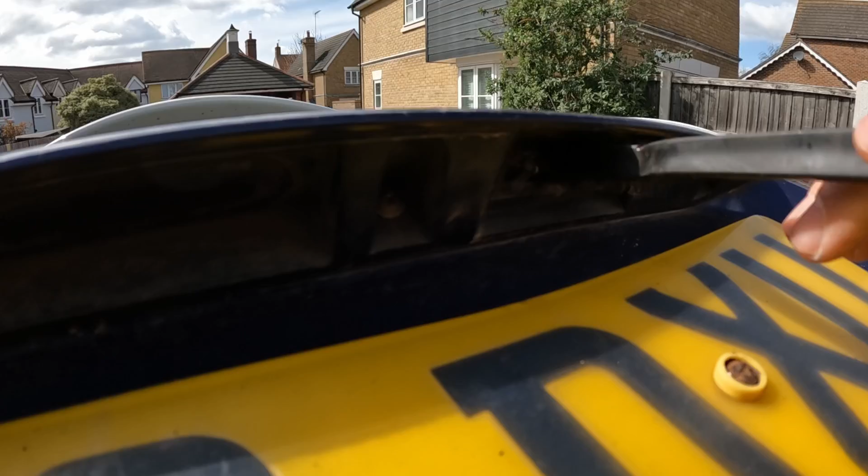Oh look, you can see that, that's all just coming out. Green stuff. Hello and welcome back to yet another episode of me trying desperately to get this car working.

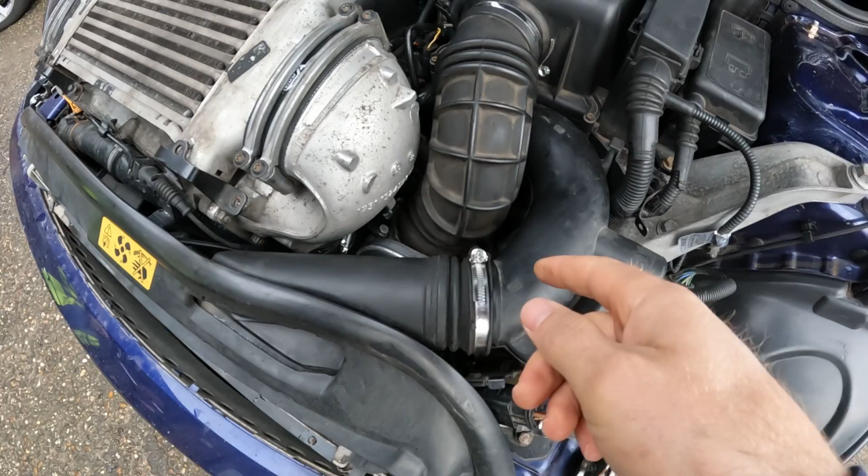I am here at Torque Monkey in Chelmsford, where the fantastic Tim, who's just there, is going to come in here and take a look at this boost leak that I've got. So you know I was chatting about the clamp on the hose right at the bottom there, and I couldn't get it past the plastic part of the intake for the supercharger. Saw that in the last video.

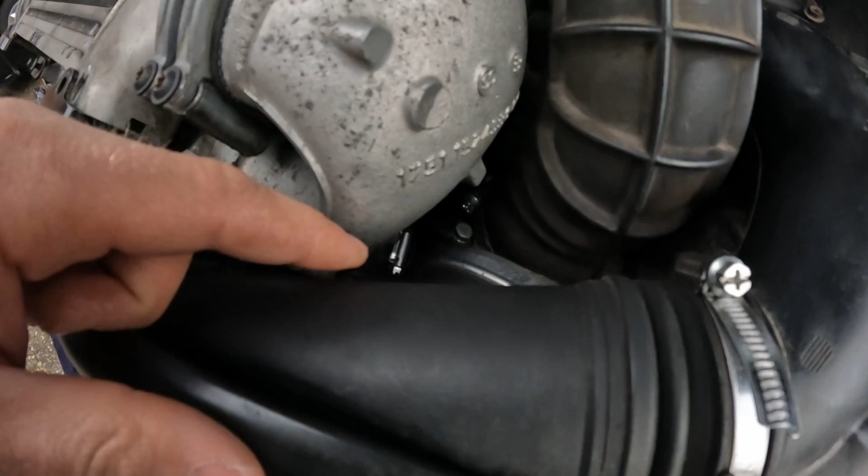He reckons it might be something as simple as that, and there is a way of actually getting that clamp on there, even though it's like 1mm thick. It doesn't go past the inlet. Tim reckons it could be that. If not, he's got some other places to look at.

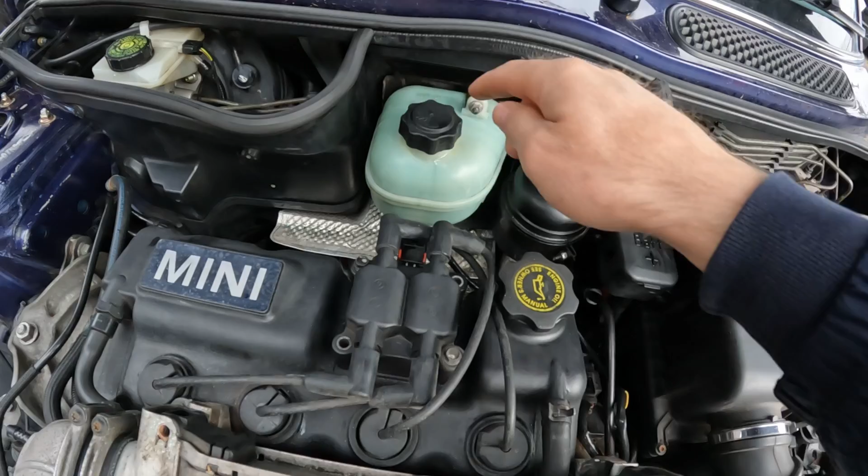And also, I think we worked out what might be the deal with this reservoir. It might be simply that it's not actually linked to all of this. This is just third party and it's not really the correct item, so it's just not sealing properly. I think we might just try and get a genuine BMW Mini item, and that might just fix that little thing there, so that's good to know.

See, that's something that you don't know when you're just poking around the internet by yourself. There's no way I ever would have looked at this and known whether that was OEM or not, so that's why you have to call on the professionals from time to time. See, look, it won't even go on properly. Piece of... But he's very knowledgeable on these R53 Minis. We've just been chatting for ages about it. I think I've just used up loads of his time. But check this out.

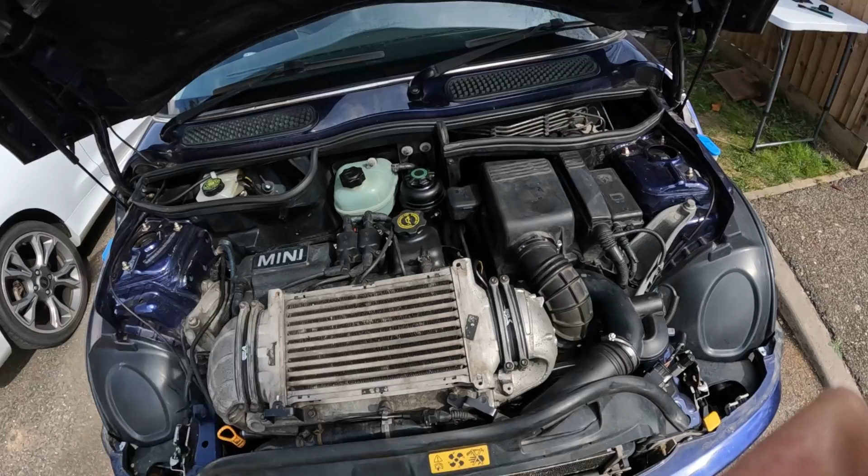Right, okay, it is the next day and I've got the car back from Torque Monkey Garage, and it looks like they've fixed it, which is absolutely amazing news. I've just got the car home now, it's running, it's up to temperature, let it sit for a bit, see if anything happens. But it absolutely definitely was a boost issue. I'm going to take you through everything that was wrong with it, but even just listening to it now, it's idling a lot nicer. I suppose before I didn't even realise that it was idling poorly,

but right now it sounds a lot nicer than before. Okay, so a few of you have been pointing me in the right direction with this boost leak, and the main culprit was this green seal here. It's hard to show you now with the car all back together, but you saw in the last video there's a plastic pipe that runs down into the intake for the supercharger. Now a few of you have mentioned this. GH in the comments, you've mentioned it, but there's a guy going by the name of Mini something like that.

Oh, the bonnet just closed. That's ever so nice of you. It is really windy. I don't know what's going on with the weather. The temperature's just dipped to 8 degrees. It was 17 degrees the other day in bright sunshine. Today it's been snowing in parts of the country. I don't know. I don't make up the rules.

All I'm going to say is Mini Doniel, if that's how you say it, has been commenting on pretty much all of my videos, saying it's the green seal, it's the green seal. Thank you for that. I was paying attention, I was listening. I just couldn't be bothered to get in there myself.

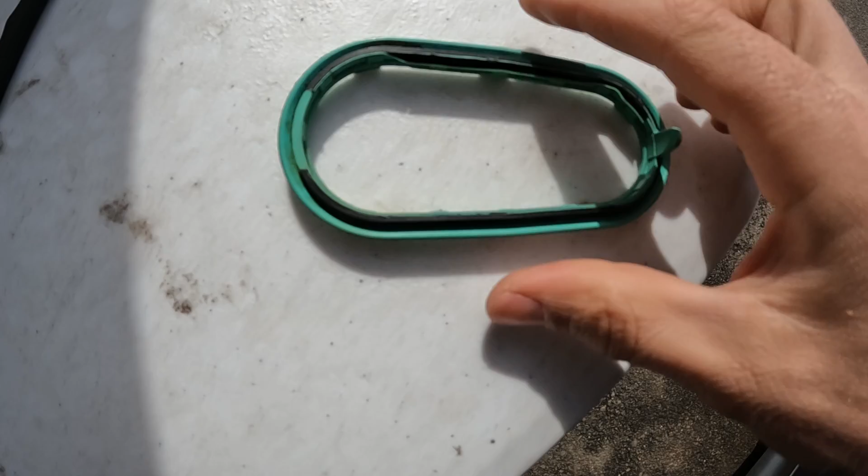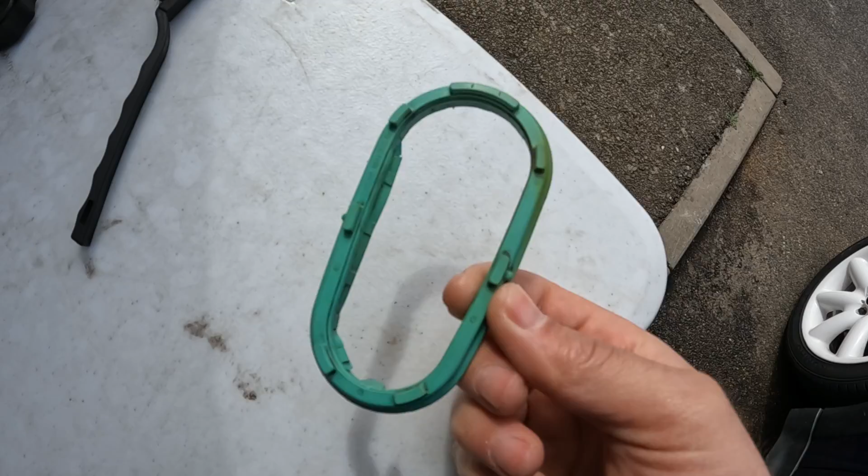So this seal is brand new, I replaced it when I serviced the supercharger. You can probably already see that this bit of rubber right here is split, and it's split in there too. What was actually happening, this had folded back on itself like that, so it just wasn't sealing anything, air was getting through past this gap, and that is what was causing the whistling sound.

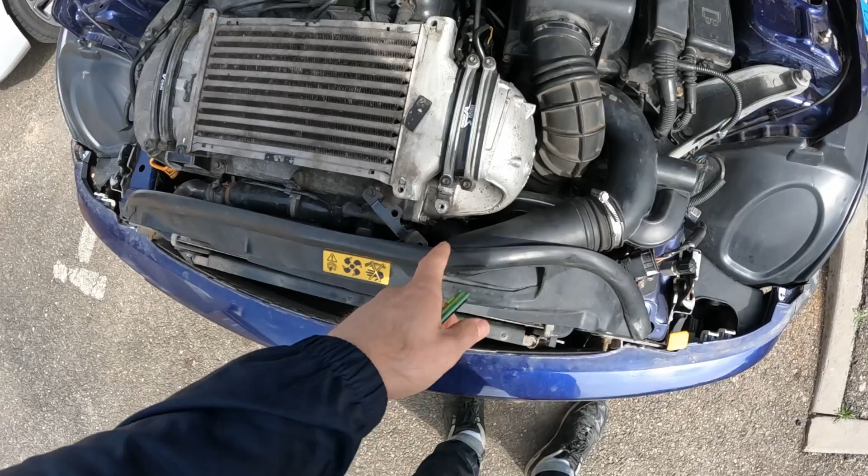Now I broke this, because when you take the plastic pipe off to service the supercharger, this green seal sticks into the pipe, so you pull it out, and then it looks obvious that the way this goes back on the car is you put this back into the plastic pipe, and then push the plastic pipe right up into the supercharger again. But it lulls you into a false sense of security, because this sticks into the pipe and it's not supposed to.

What you're supposed to do when you reinstall these is you actually slip this onto the supercharger part first, then you butt up the plastic pipe. I did it the other way around, and so that's what caused that to break. So the guys at Torque Monkey, what they've done is they've put a whole new green seal in, and they've fitted it properly this time.

The rubber hose that you saw connecting the intake to that plastic charge pipe as well, they've now replaced that with a much nicer item than the one that I replaced it with. And it's a proper silicone hose, and they've managed to get the clamps around it. There is a bit of a method to actually getting it on. They've done that as well. And I mean, the car's running now. Let's give it a rev.

Nice. It would have started whistling by now easily, especially revving it like that. So it definitely looks like that's fixed. So that's fantastic. So that means the engine's actually going to be running nicely now, because air is getting in through the intake. It's going past all the correct sensors, and so it's not going to be over fueling and then running rough. So this is all fantastic news.

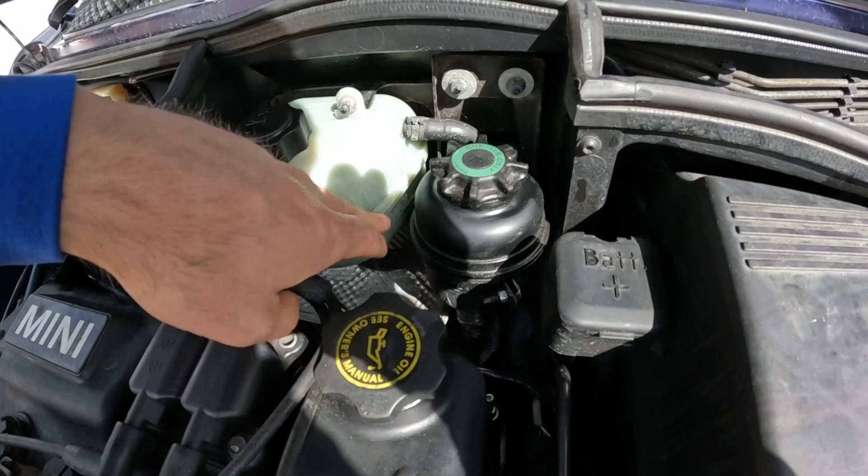Okay, so now on to the coolant issue. Thank you to everyone that commented on the last video offering up suggestions as to what might have been causing that. It turns out it was actually pretty simple. A couple of you did actually catch it. So one of the weak spots on these Minis are these tanks, and so apparently they fail around the seam around there, and they can fail at the hoses and that.

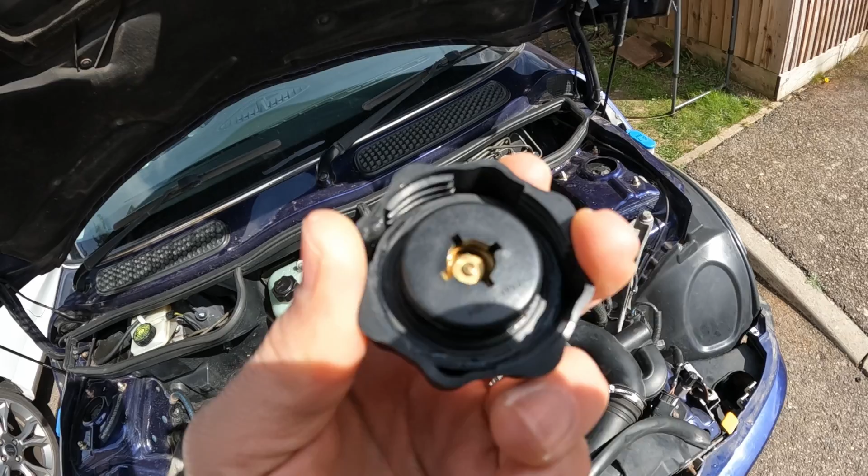On this particular one, it was actually the cap. So this is the cap that was on it before. This cap has just kind of failed. So if you can see this, sorry for the wind, it's really flexible. It's so easy to just push and mold like that with your hand. And we think that this is a non-OEM cap. This is actually just an aftermarket cap.

And so what it was doing, you could actually put this cap on and you could turn, and you could just keep turning, and it would basically never seal completely properly. You could over tighten it really easily, and then you go back to stage one and it'd pop up, and it was doing all sorts of mad stuff. Why would that cause such a catastrophic failure of the coolant if it was just the cap? Let's get into the classroom.

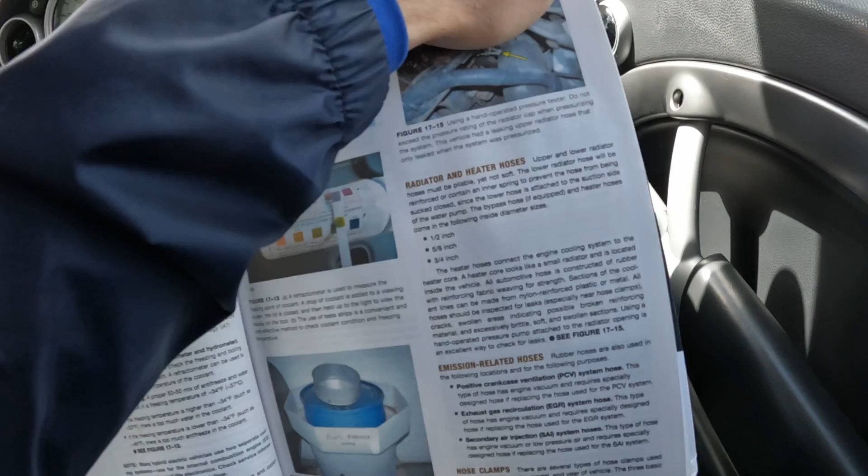And I say the classroom because I've been studying. I'm trying to take this whole car thing really quite seriously. And I purchased this book, Automotive Technology, Principles, Diagnosis and Service. I mean, it's a monster of a book. You can just see how thick that is. It's absolutely ginormous. It is a textbook, and it is incredibly dry. And I've just started reading this thing, basically cover to cover. Deals with absolutely everything you could ever imagine. It tells you all the principles of the car, how they actually work.

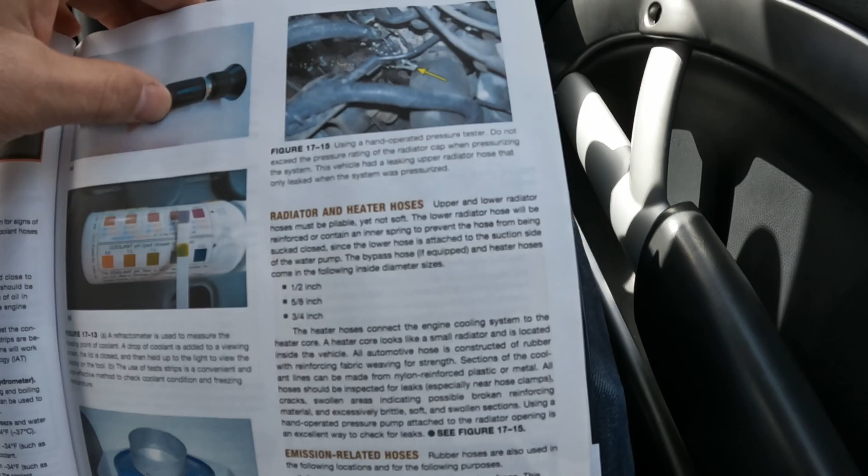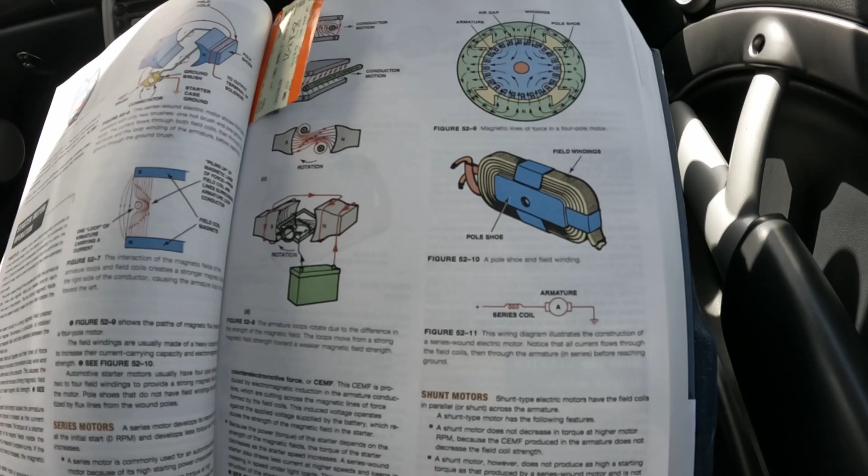I mean, look, if I just flick to this page here, this is starter motor operation. It's got all these diagrams, tells you how starter motors work, what to look out for, how to service them, how to diagnose if you've got a bad one, da da da. It's so in depth. It's great. If you're like me and you're just coming from zero and you don't have a teacher, just start reading this thing. I have. It's been absolutely illuminating.

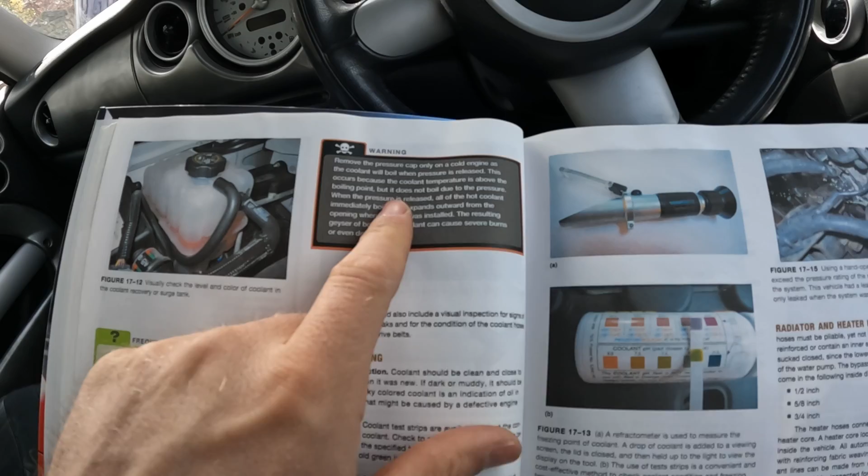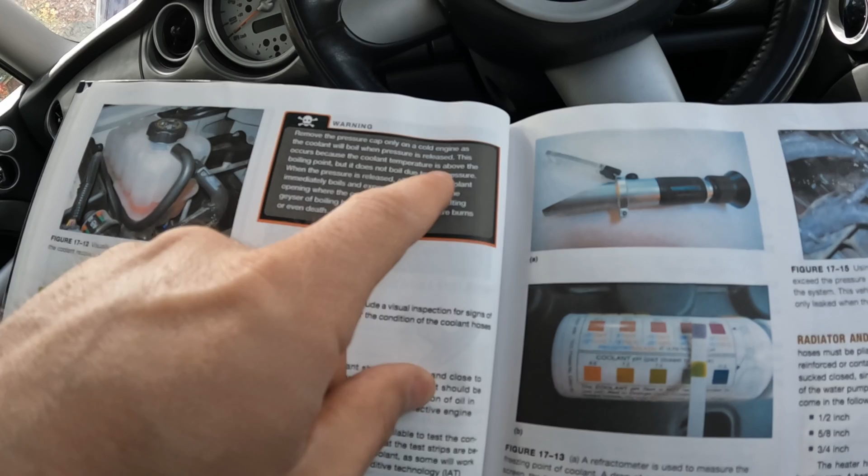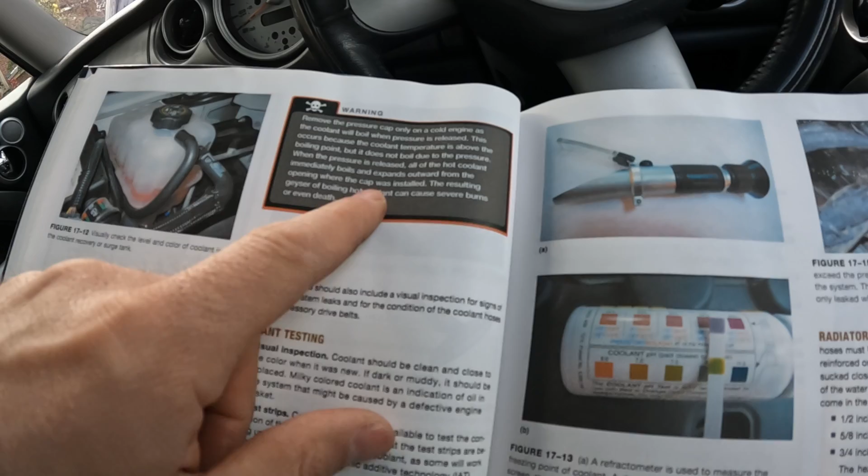Anyway, right, and the point of this is that it just so happened yesterday I'd got to this page. I'm in the coolant section, and there's this big warning here, and it says, remove the pressure cap only on a cold engine, as the coolant will boil when pressure is released. This occurs because the coolant temperature is above the boiling point, but it does not actually boil due to the pressure. When the pressure is released, all of the hot coolant immediately boils and expands outward from the opening where the cap was installed. That is the issue. That is the issue I had, right?

So what was happening with the coolant tank on this car is that the cap simply wasn't making a proper seal. So when the whole coolant system came up to pressure, the cap just isn't making a seal. It begins making a seal because there's not that much pressure, but as the temperature rises, there's an increase in pressure. Now, if you think back to being at school, this would have been GCSE physics or chemistry. You had things like the ideal gas laws, Boyle's law, Charles's law. I think one of those laws probably applies here.

You might remember the equations like P1V1 equals P2V2, those sort of equations. Basically, what's happening here is the cap is sealing just fine, the pressure of the system rises, the cap is then failing, and then that sudden change in pressure allows the liquid inside the coolant tank to actually begin boiling where it couldn't before because it was being kept under pressure, and that was what caused it to go shapow everywhere and all over the engine bay.

So, you know, we've had the car running now for quite a while. It's come up to temperature. They've put new coolant in it for me, and that cap very much seems to have fixed the problem.

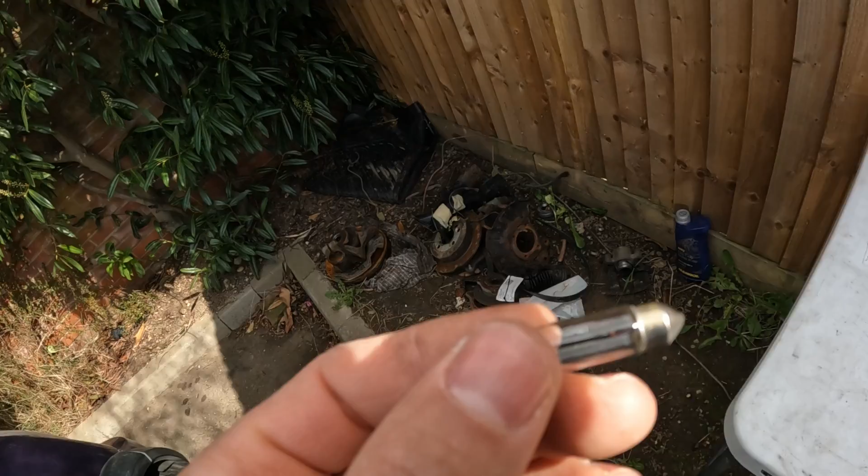Oh, look, you can see that. That's all just coming out. Green stuff. Uh-oh, don't break it. Do not break that. Is that it? Okay, this isn't good. That doesn't work at all. Oh no, I need these for an MOT today. Why is it? It's just the smallest of things. The smallest of things. Oh, nothing I do is making this work again.

And you know what? So you've probably seen that I've got these 2 rust spots. This is quite common actually on these Minis. I don't know how it gets in. Maybe it gets in through the seal up here. I mean, I've got a rear wiper delete and it's pretty much just this bung in there. It's not exactly the most secure of things, but water's been getting into here and it's been getting into here,

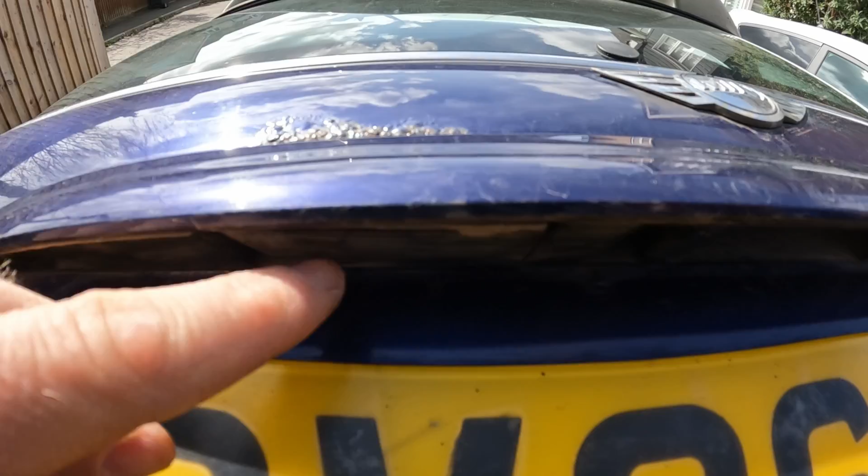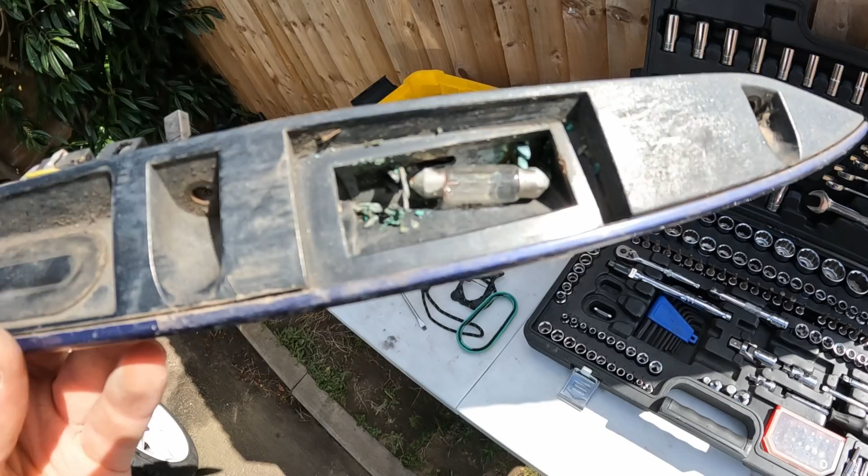or it's been getting up here or up there, I'm not sure, but you can see that it is right above the lights. So these units have clearly just gotten so much water in them that they've given up the ghost. Yeah, I mean, I just need a whole new unit in there, don't I? So I just pulled that whole assembly off and I just opened up the other lamp. I mean, look at that in there.

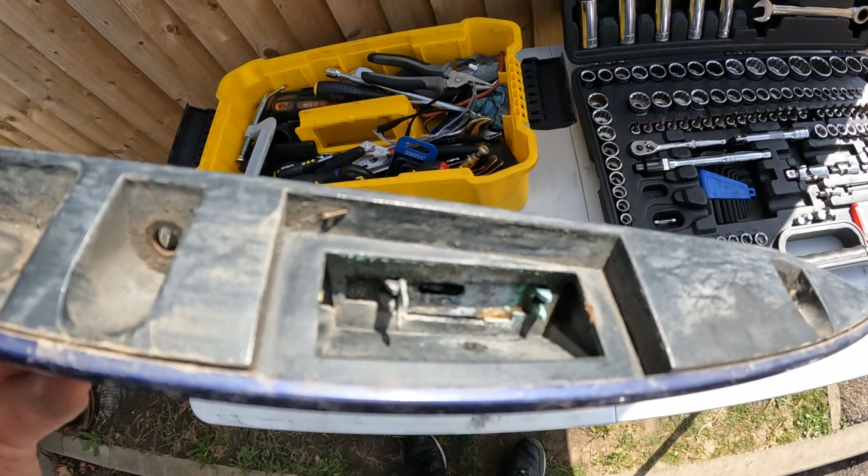I was really hoping that maybe I could just clean this up just enough to get them working a little bit, but that right there is the actual bulb holder. That's the bit that's supposed to conduct electricity into the bulb, and that's just snapped off. And I just checked as well, and you need both of these lamps working so as not to get a failure, believe it or not. You can't just have one going, so I need new units to actually go in here.

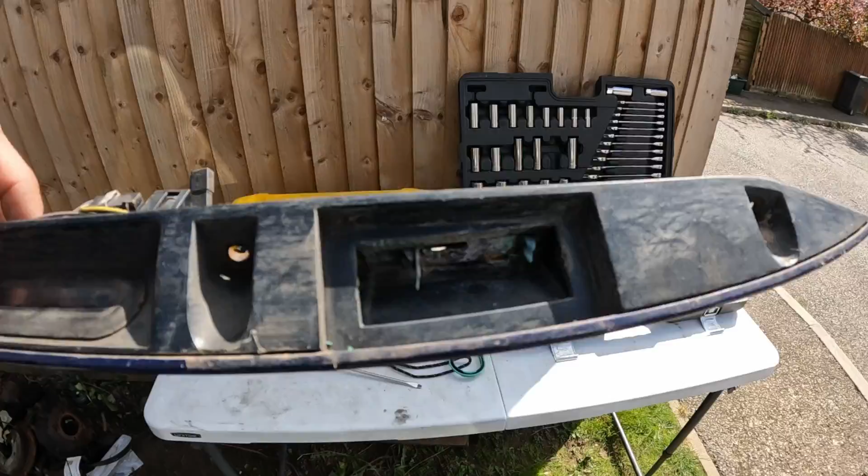There's not really any other way around it, I don't think, or maybe even just a whole one of these, because I'm not even sure they separate and come out. What a pain. You know, and this isn't even really a matter of safety, is it? Illuminating your number plate. There's nothing good that can ever come from having your number plates illuminated, because there are only a couple of agencies in the entire country that care about what your number plate says. Yeah, it's just bureaucracy.

Yeah, it's just a bonnet closing by itself again. No, you are having a giraffe.

Give me strength. What? Well, so it very much does look like you need a whole new one of these. Now the problem is obviously this is painted, and you've probably heard me say quite a few times, this colour, this black eye purple, is incredibly rare. So I did try to see how many of these have been sold. I could only find US sales data, and in the 18 months that they offered this particular colour, it accounted for 1.2% of all units sold in the US. Just to give you an idea of how rare that colour is.

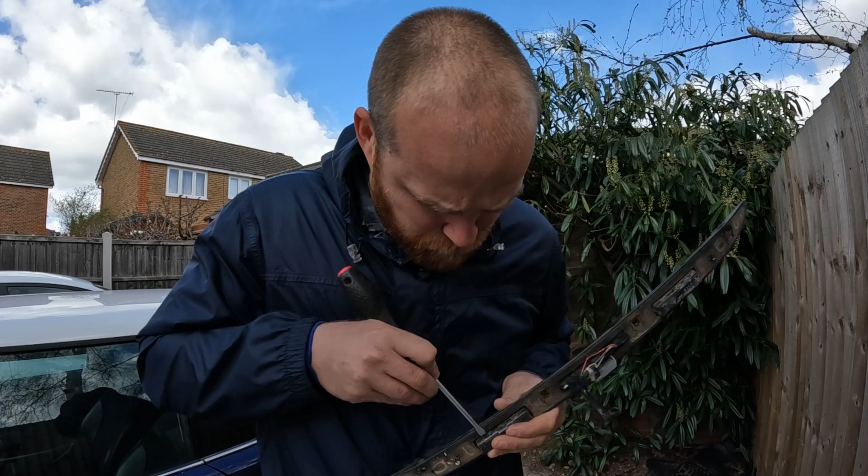And so when it comes to buying anything this colour, well, there's nothing. It turns out there is actually one of these on eBay, and it's £60. £60. That's just bonkers. I have to. Doesn't matter if you can't. Hang on a minute, maybe I can get in there and get that off. Oh, well, if I didn't need a new one, I do now. Ugh. Well, I've just snapped the cover off, but look at it. That's the electronics, and that's not replaceable. That's just...

So I have just come across this on eBay for £54, and that, ladies and gentlemen, is a whole new tailgate in black eye purple. £54. That's actually less money than the used one of these that's on there. What if I bought a whole new tailgate and then not only solved the issue with the handle, but I also solved this issue here with the rust? Rather than trying to fix the rust, maybe I'll just replace the whole tailgate.

Oh no, god damn it. This one's got a chrome boot lid thing rather than a purple one, it's chrome. That solves literally zero of my problems. I've just found another one as well. Also chrome. There's actually two purple tailgates on eBay, which is rare, and they've both got that chrome thing. Okay, so I just phoned up, cancelled the MOT. So that's not getting done now.

Been trying to work out, you know, what is the best port of call here. So the trouble is any of the boot lids that are on eBay, they have this whole bit here, it's chrome. Not just that, but they're not for the Cooper S, so they don't have the spoiler either. And so you need the spoiler. And I've just been looking at how to take that spoiler off, and they're not just bolted on, they're properly glued on hard, and people damage them taking them off. It's just kind of not worth it.

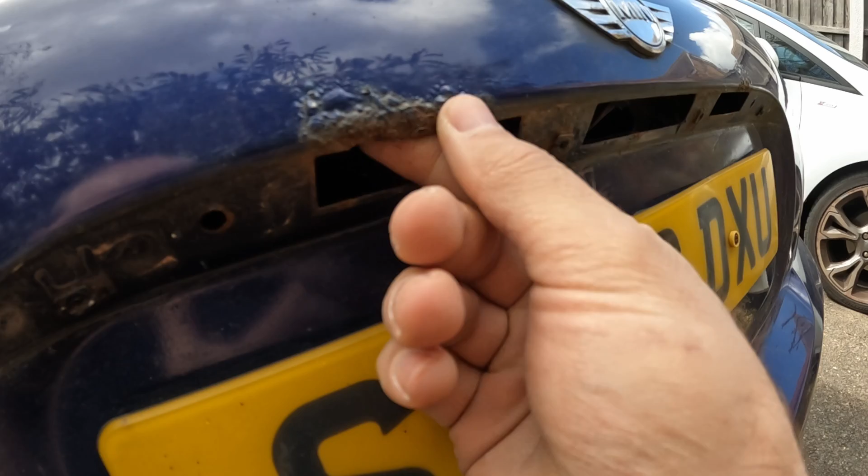So I think what I'm going to do is shell out that extortionate amount of money for the only one of these units in purple that I can find. And I think I'm just gonna have to get some quotes. Oh Jesus, look at that. Oh, that isn't good. That is terrible. Oh no, I should probably stop doing that. Do I get a quote to look at trying to fix this? Is that even fixable? I mean, you're gonna have to start welding metal in there, aren't you?

And just the tiniest little things that open up the biggest can of worms. The colour of this car is a blessing and a curse. Blessing because it's rare, curse because it's rare.